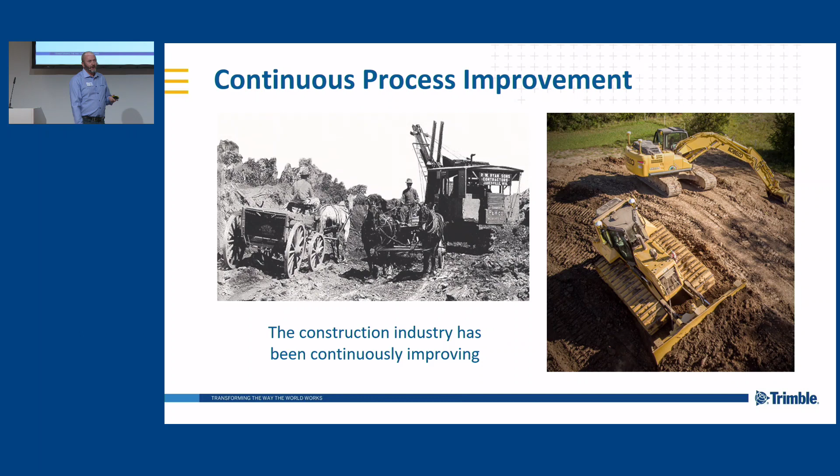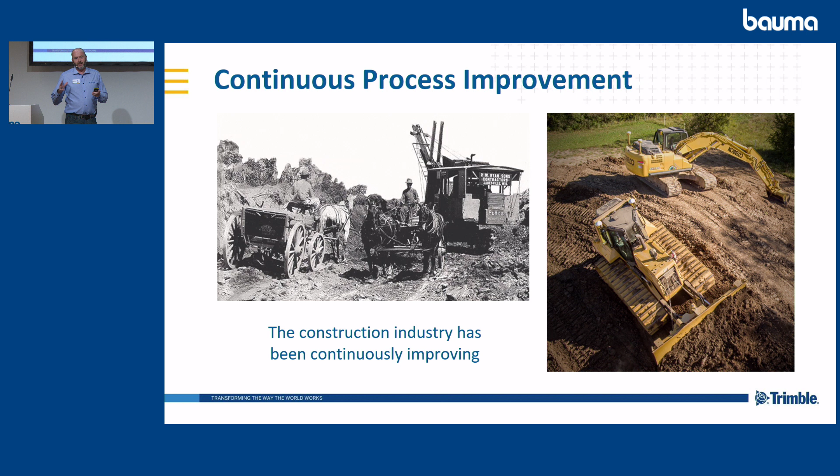But when you look at construction, the construction industry has been continuously evolving. Machines are getting faster and bigger, and just look at from the old horse and cart days to what we've got today with the heavy machinery and all the operator comforts that we've got. So not only just the machines, but the machine control itself has been on a journey.

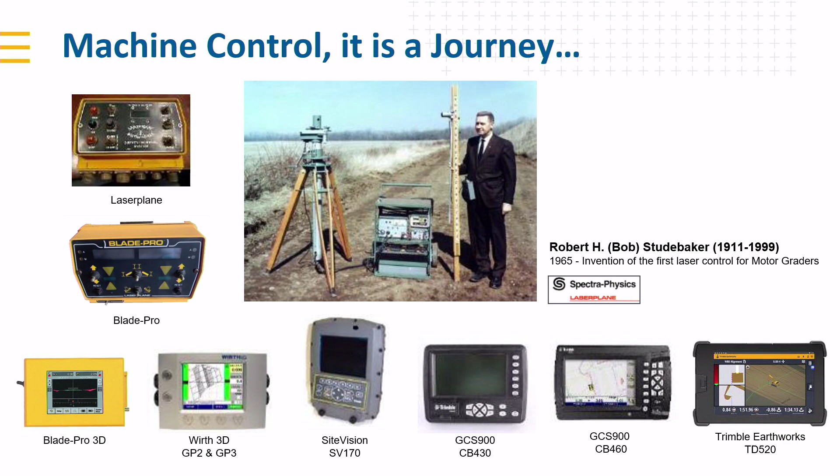And right through within Trimble with Bob Studebaker back in the late 60s, early 70s, when lasers were first introduced to motor graders. What comes after lasers and graders? Automation. So back in the 70s, we were automatically controlling a blade of a grader. So grade control's been around a long time. And over that, things got better, faster, cheaper, easier to use as well. A long time ago, things were very hard and complex, but things aren't like that anymore, and people understand and they trust grade control.

So I just wanted to show you that grade control has been going a long time, and grade control is the start of autonomy. It's automation, and automation at different levels is how you get to autonomy. And that's what we're going to talk about today. So machine control, pretty much any machine that you want, you can put a grade control system on it today. All the main machines, excavators, dozers, graders, scrapers, you name it, if there's a will, there's a way. Dealers can make it happen. And you can also buy machines out of the factory with grade control.

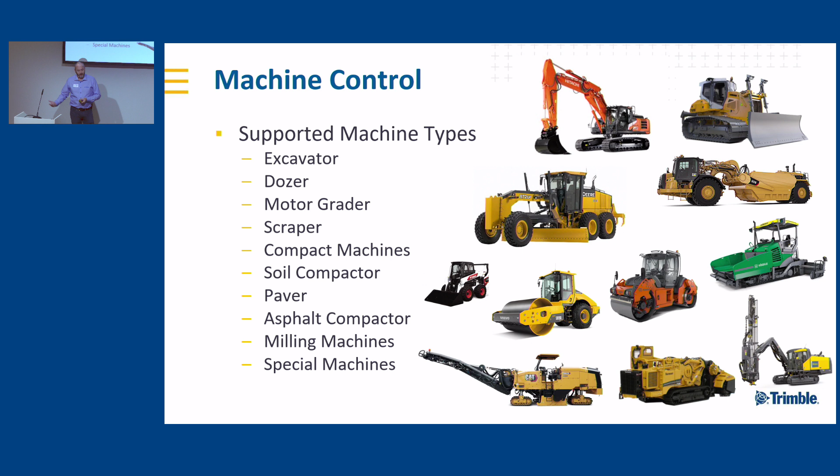And grade control is critical because you can talk to OEMs and they can spend millions of dollars over years of time, and they're looking for 2 or 3% productivity gains. You can put grade control on a machine, and automatically you can get 30% productivity gains. So there's lots of studies out there. One thing that we like to do is compare lesser skilled operators with advanced operators. And when you're leveraging automatics, it's so easy because you can just turn a button and we can help you. And we can see that we can definitely help new operators, but we can also help experienced operators.

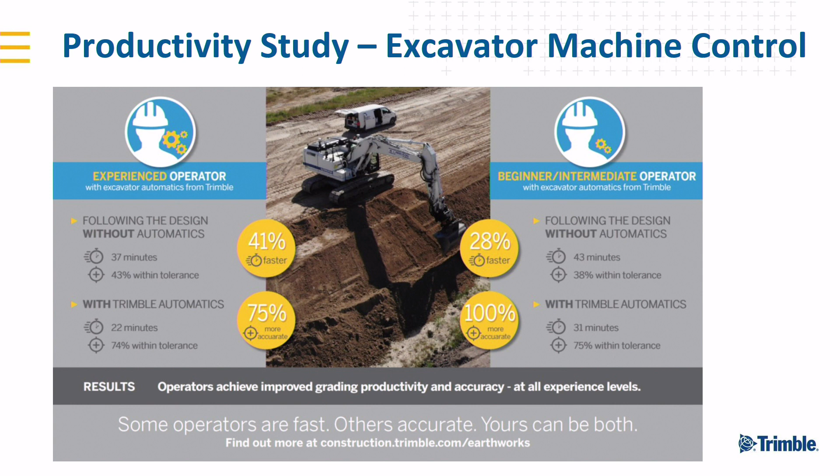And we've got some great examples where experienced operators are getting 41% faster and 75% more accurate. And we might not be able to make a lesser skilled operator as good as an experienced operator, but we can close that gap a lot. And we've seen examples of someone that's never really run an excavator before can get 28% faster. And the kicker here, 100% more accurate.

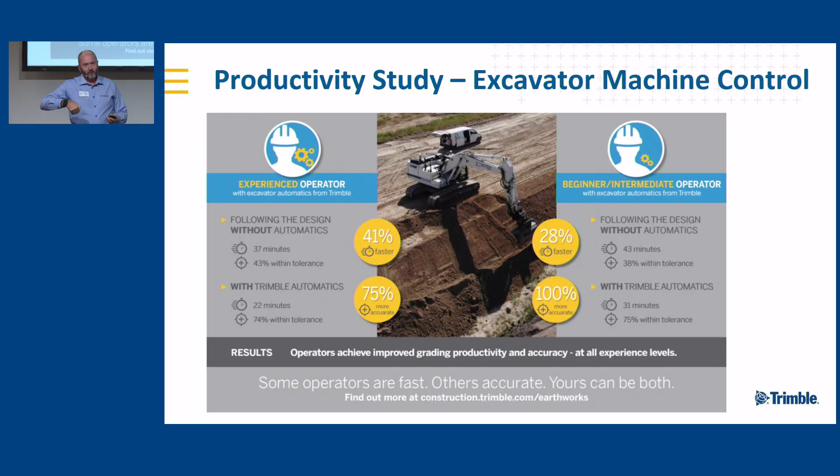And think about when you're doing excavation and stuff, and if you're accurate the first time, you can save money real fast, because if, say, you're trenching and you dig too deep, what are you doing with that material? Sometimes you've got to pay for it to get transported off-site. Then you come back in to put the pipe and you need the bedding. What happens? You need to actually put expensive material into the trench because you've taken too much stuff out. So yeah, a lot of cost savings, a lot of productivity gains, less fuel, sustainability. Sustainability is a key thing at the moment.

And what we've got, so we know there's technology, there's a new workforce coming through that isn't afraid of technology. But we've also got, on the other hand, experienced people that are actually leaving the industry. They're retiring.

So in Trimble, we call it the construction dilemma. Now, the problem: a lot of the systems that you can buy today, yes, you can automate it. You can click autos, and we can drive the blade to design. That's great if you actually know what to do as an operator. Like, where do I start to actually push the material? And with automatics on a dozer, for example, you could actually do the wrong thing faster before someone catches you.

And the foreman goes, whoa, stop doing that. Now you're having to move the material twice. So a lot of the systems today still require the intelligence of the person running the machine. But when you think about what we need to do for autonomy, we actually have to tell a machine what to do. And for Trimble, like I said right at the start, the journey to autonomy is important.

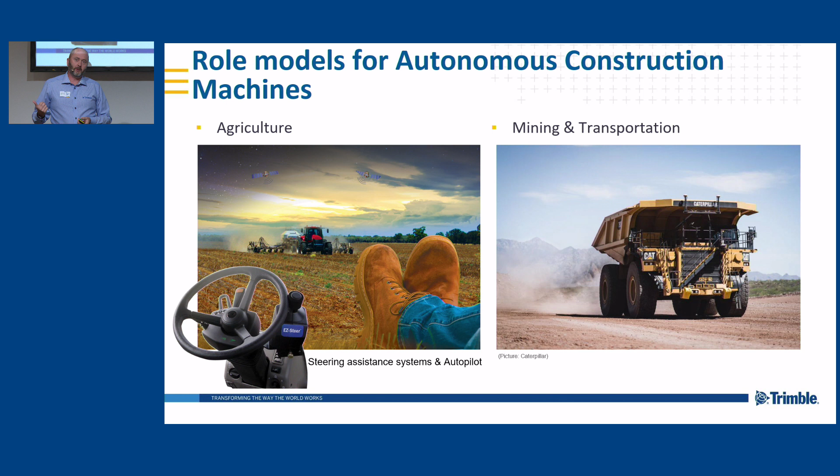So we can automate a dozer and steer it. We can steer a compactor. And compactors are very hard to actually steer because they articulate. And you're doing the same mundane task every day. And in order to make sure you don't miss anything, people are actually getting wider overlaps.

So if you can automate steering on a compactor, we're leveraging the same stuff as we've done in ag. You can reduce those overlaps, and you can make that a much better environment for the operator. So ag is a big role model for construction.

Mining and transportation is another one. Everyone knows there's been autonomy in mining for a long time. Caterpillar, right up there. Mining is different than construction though. A mine lasts for a long time in a controlled environment where you can control access. But when you think about what's happening in mining, you can take parts of it, but it's not the same. So you can't just turn the switch and take what you've done in mining to fit for construction. But there's a lot of learnings and a lot of things that we can reuse within mining and ag.

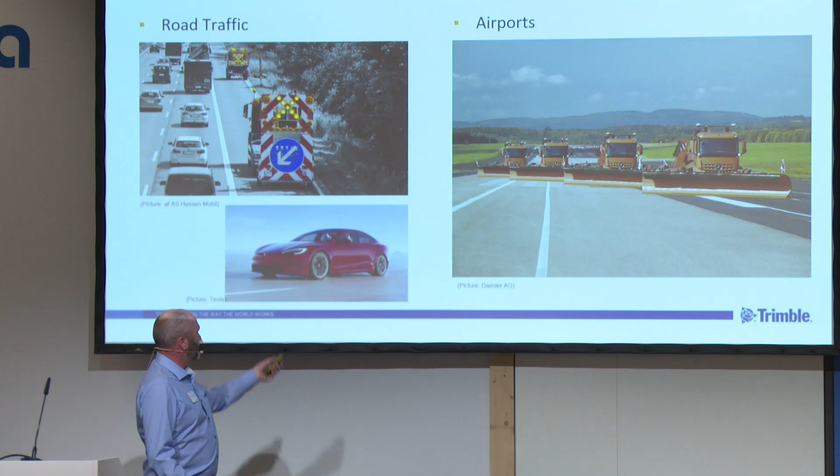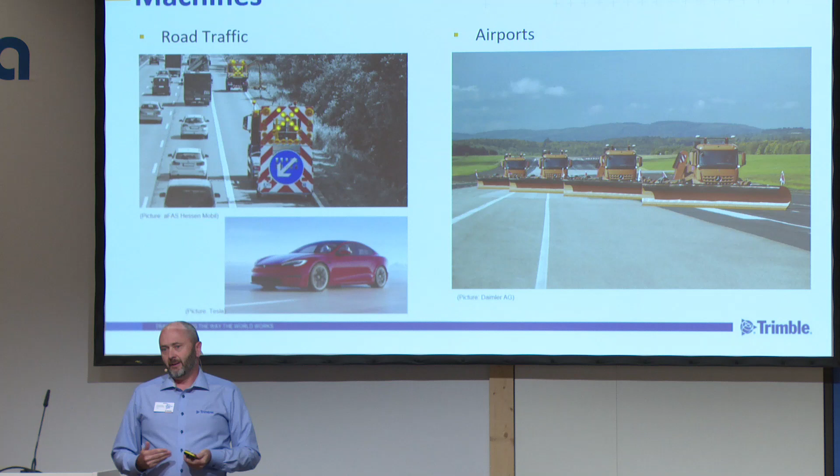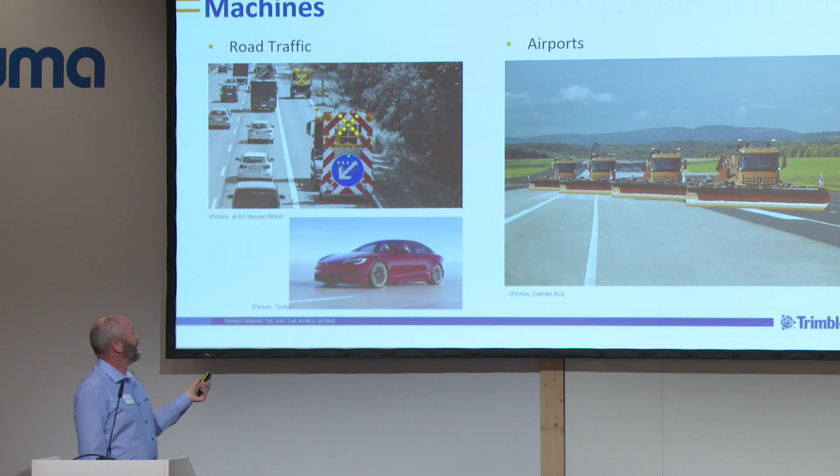Then you've got a lot of examples. Everyone knows Tesla sort of reset the bar and expectations. But then there's also lots of examples out there where you've got leader-follower type activities, where on the left-hand side, you've got a manned machine, and then you've got a safety vehicle coming in behind. If someone hits that, it's not very safe. So add safety, get the person out of it. It just has to follow that machine, that mower.

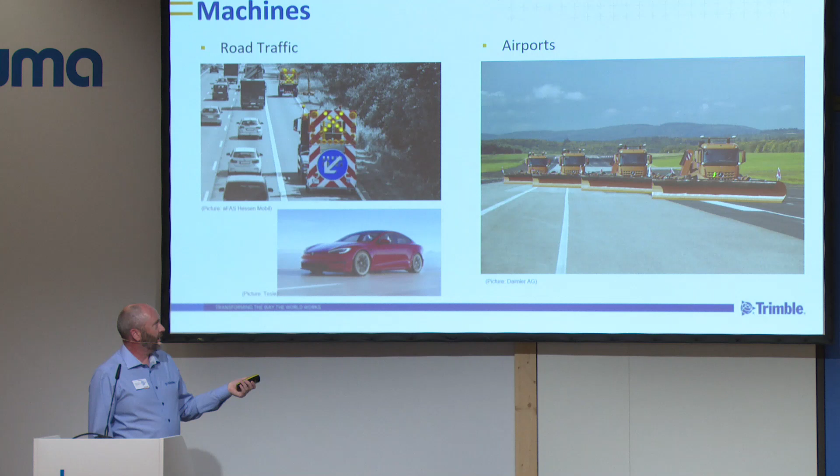Spreading and removal of snow on airports. A manned machine, and then in this case, you've got three machines following in unison behind. So it's not full autonomy. Well, part of it is, but there's still a person in it. And it's all about the journey and the progression. So you step back and think, so what's really motivating? What's driving autonomy?

There's certain tasks that are fit for automation and autonomy. Example, the compactor. Mundane job in a controlled environment where you're just going up and back doing spreading. If I was a contractor in a position where I could get the machine to do that, good. I'll go and do something else that's more useful for what I want to spend my time on.

Think about an autonomous excavator. Excavators are very dynamic and they do a lot of things. You're not going to just have an autonomous excavator that can do everything, but you might have an autonomous excavator that can do a certain few tasks very well, and maybe I want to have a break or I want to go and do something else. I'll set that excavator off and do a task. Maybe I just want it to trench. I'll go away and do something else.

So automation is really about helping people do their jobs and helping people manage more machines and really using the value of what people can do more efficiently and let the robots do all the mundane stuff.

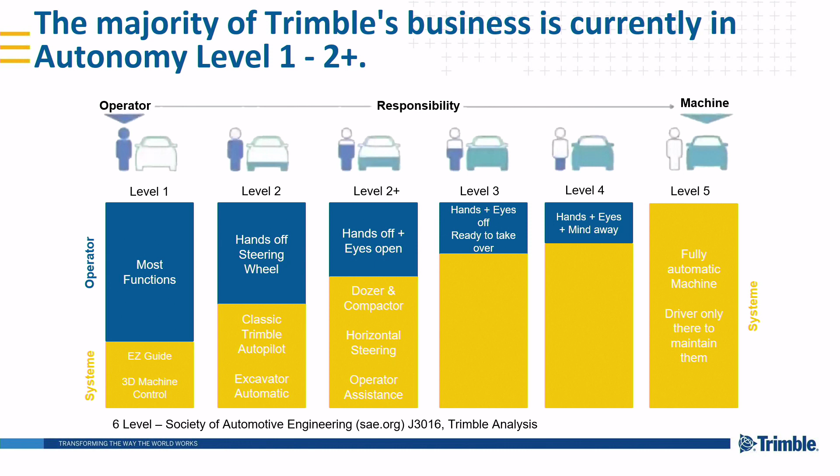So when we look at the different levels of autonomy, level 1 is basically the operator is still in full, complete control. Level 1 is still grade control, but I need to make the decision of what I want to do. The grade control system can give me indication and guidance, but the person is in full control. So your standard 3D machine control is level 1.

Then you start adding more automation to it. So we add automatics to that grade control system. Maybe we can steer things, but you're still in full control. Add some more automation. So you can start seeing the blue, which is the person, is doing less. Now within Trimble, mainly we're in the level 1 to 2 plus, where we add assistance with steering. We can automate the blade. We can steer it. But you still need a person in there, and the person is still in control. They're still going to stop.

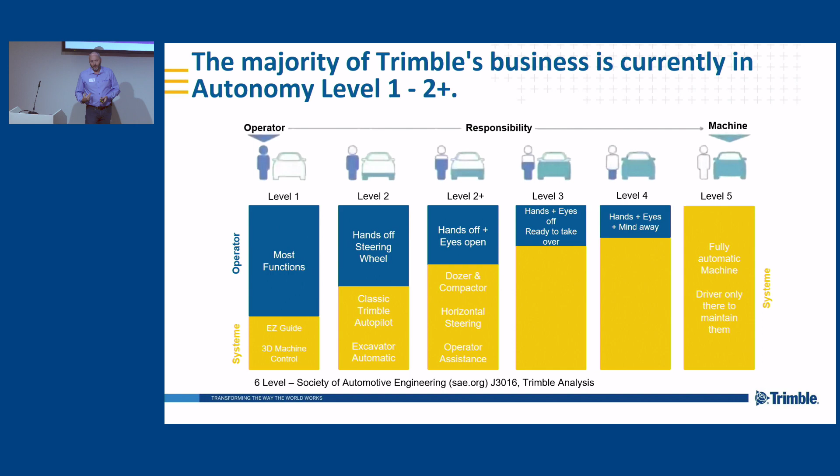Add some safety to it now. So the operator is still needed. They're still the final backup, but now you can start adding alerts and warn people that something's going to happen, to a point where the person's there and they're really just along for a ride. The system's going to stop when it needs to stop, but maybe that system can't do all the tasks and only a few things. Where level 5 is where it just does whatever it needs to do by itself for a lot of tasks.

That's going to take a long time, just like the other presenter said. But how we get there and the value that we can do along the way is where it really comes into play. So what do we need for autonomous construction?

Within Trimble, all of our autonomous solutions and assistance stuff that we're working on is all built around our fundamental core grade control system, which is Trimble Earthworks. It knows where it is, and then we can add to it with operator assistance. We've actually got an autonomous compactor here at the show, which is going to be our lead machine.

And one of the reasons that a compactor is our lead machine is it's very containable and controlled. It doesn't actually move the material, it just runs over it. But think about all the things that you need to create an autonomous compactor. There's a lot of building blocks that can be then scaled out and leveraged with other machines. So machine control and automatics is a key enabler of what we feel that we need for an autonomous machine.

Augmented reality and remote control. Augmented reality really helps with not only helping the person understand what they need to build and see, but also, when you look at augmented reality and cameras, you can start using those cameras for other things, with understanding the environment and being able to make decisions about what may be there.

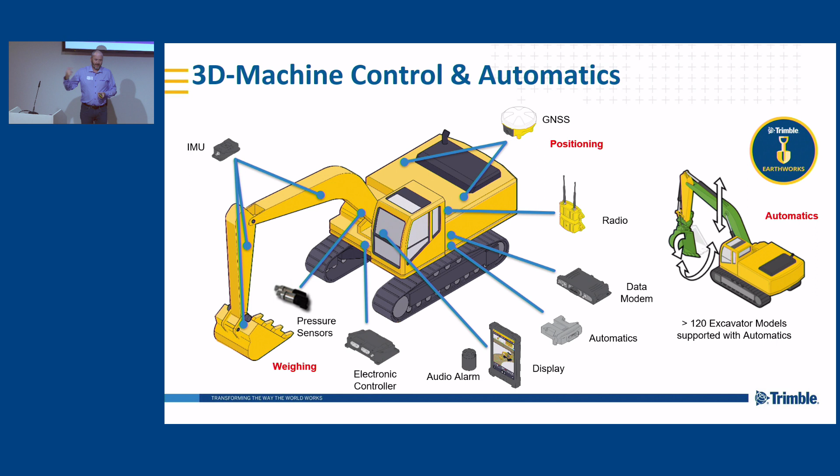Then you need the ability to have an interaction with a person or an operator, so you need a user display. And then you need the connectivity element, so you can send tasks and get that data off the machine to understand what happened. Then you need the ability to make something move. It could be with hydraulics, or it could be talking to the EH system on the machine.

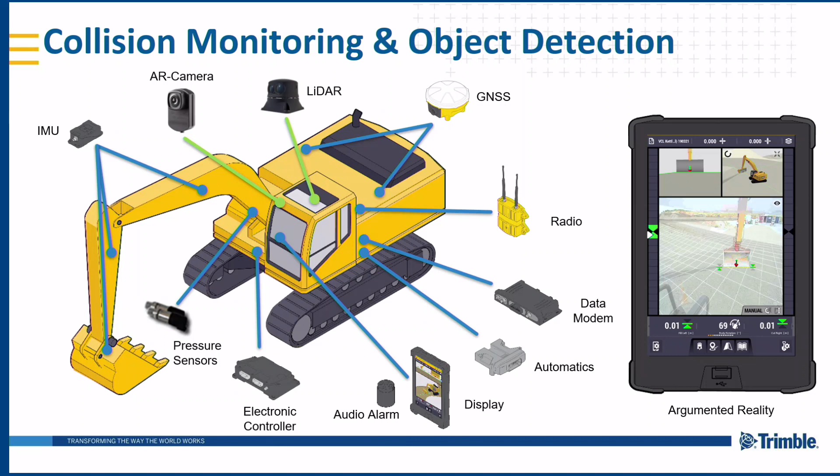Then if you're running autonomy or you want some safety aspects, you need things in there like what a person would do. A person's got eyes, so they look around and see. So you need to let the machine do that, with sensors on there to understand what's around the machine. In some cases, it's pretty obvious, right? But if you've got sensors on a machine where you can't see, it can see for you. So the ability to detect what's around you, and then there's tools to actually help the operator do their task.

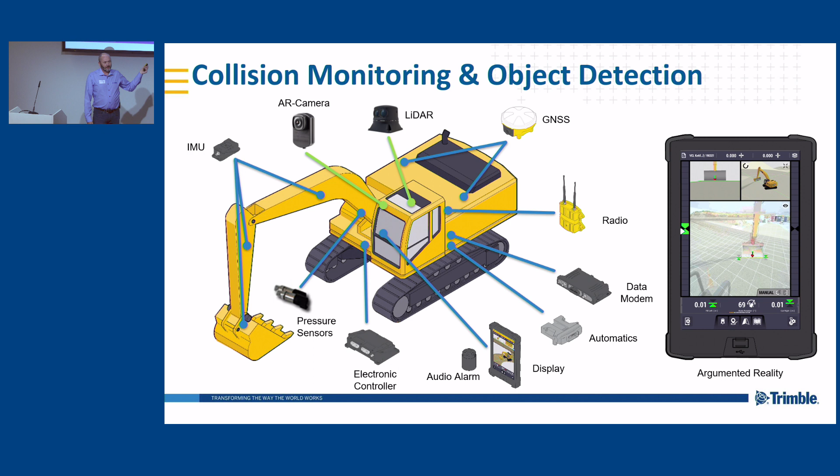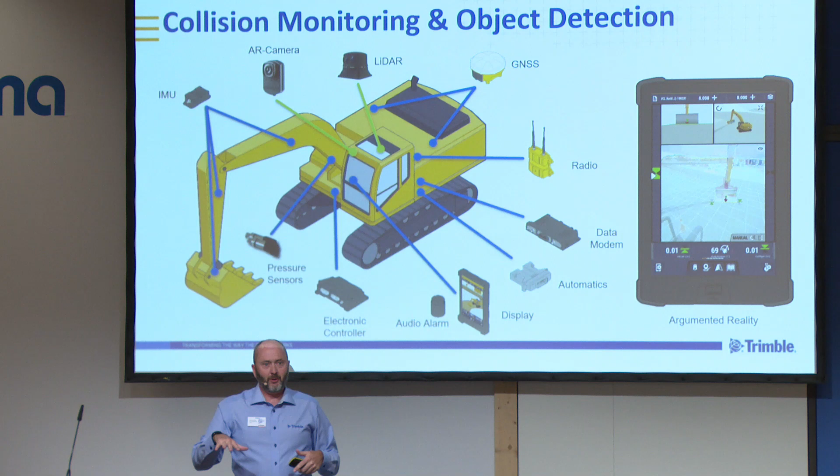There's an example here where we've got augmented reality on the excavator where you can see the design on the machine and you can also see the environment. And that's really good for people to understand what they're going to build versus just a 2D plan or a 3D view. You can actually see how that is in relation to the real site. And it's good just to visualize and understand what's happening.

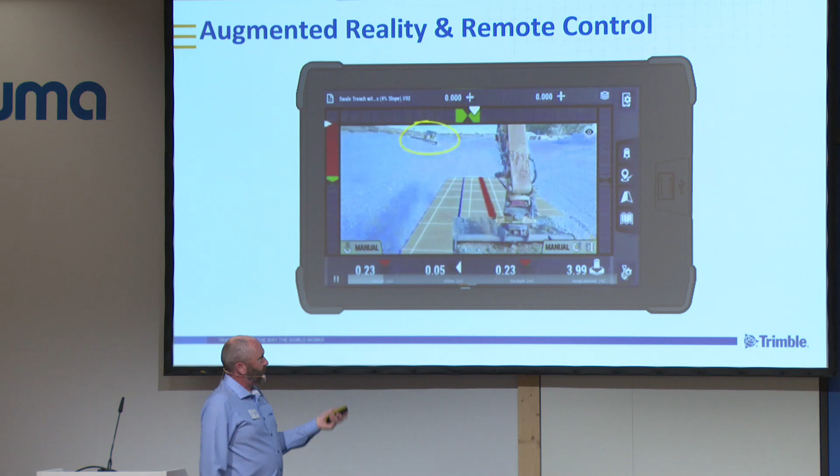Then you can take it a step further. Potentially you can see through the ground where the utilities might be. Or if you're looking at the machine display, you can get a sense of what's around the machine. Think of an excavator. You see it all the time. It's not safe, but a person in the trench, and you've got the operator looking over, trying to see what's happening. Most of the time, they're not putting the hydraulic lockout on. They're leaning over. What happens if you knock the levers?

You can hurt somebody. But if you've got the ability to see in the trench without actually putting yourself in a safety violation, then it's safer. Ideally, you don't have anyone in the trench altogether, but that doesn't always happen, right?

3D design and actual condition surveying.

So I won't spend too much time. I've only got 2 minutes and I don't want to get kicked off the stage.

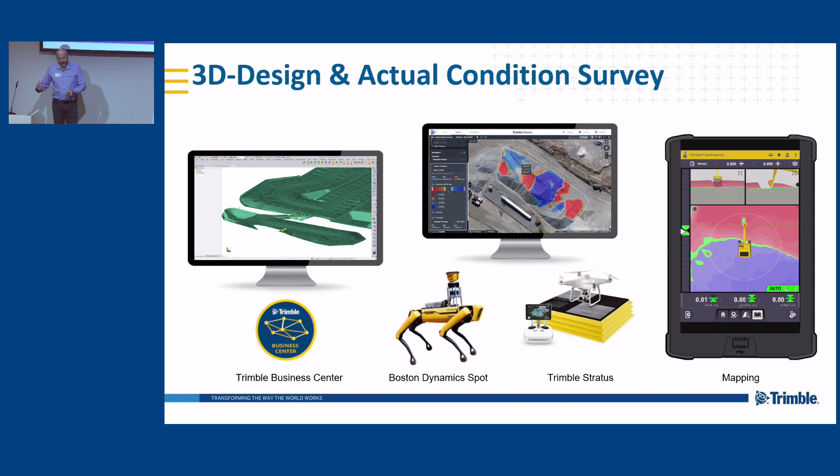But the key point here is that you need to have designs and stuff that you want to build. You need to be able to have the tools to monitor and record what's happening. And you need to do it now. And you need to be able to make those decisions without waiting next week to find out that you're behind schedule. And with that, you need tools to help you, like scanners, various software elements, and the tools to help you run the job. And all that stuff is needed for autonomy when there's potentially no one doing the task. But we can provide that value along the way.

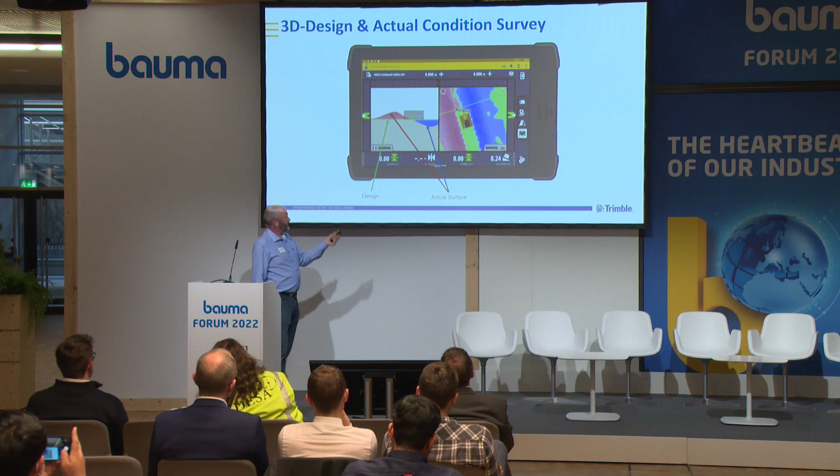And it starts, again, just adding more to the machine control. So in here, you can see the design. You can see, in this example, there's been a scan, and that's been uploaded into Trimble WorksOS. The machine control systems can pull all that information down and provide you a real-time cut fill map of the site in relation to the design that you're building. So you can see where the high spots are and the low spots are,

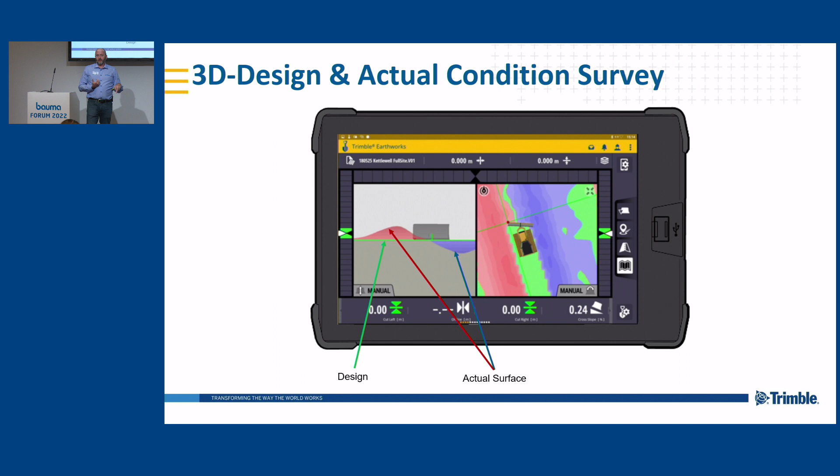and that can sort of help you do your task. And then as other machines and other surveyors actually survey and update the site, then that map on your display, in your machine, is going to be updating with it. And you don't have to wait for the stand-up the next Monday of the big cut fill board for the site. You can see it on your machine as it happens.

Here's a quick video. I'll try and start it.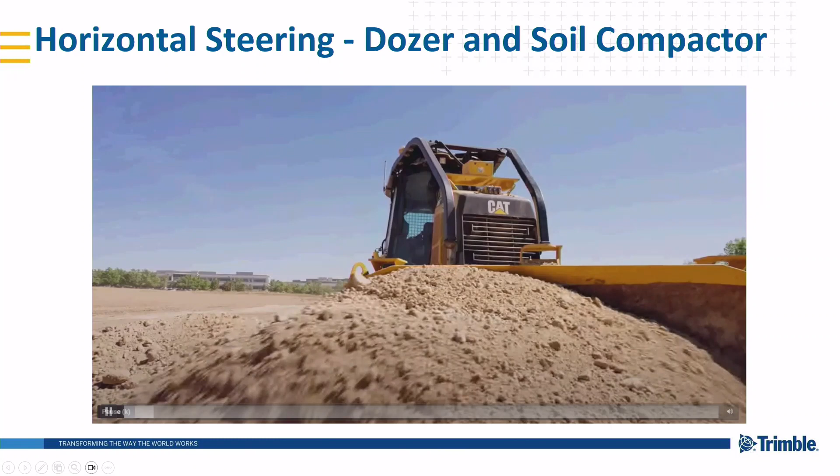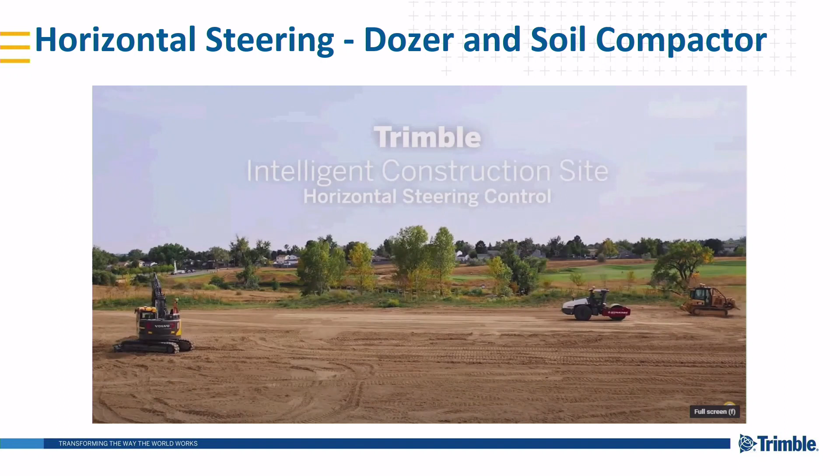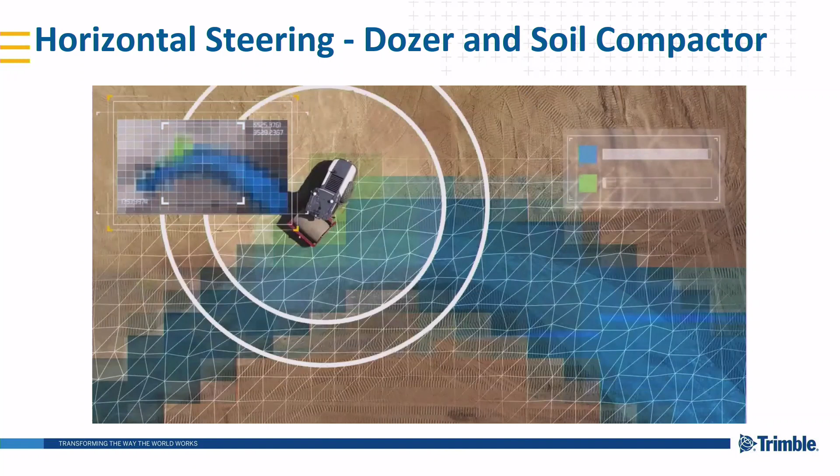Trimble is proud to partner with you on the journey toward a fully autonomous future. Taking the initial step to automate time-consuming and repetitive tasks boosts productivity, frees up resources, and gives you the competitive advantage. Horizontal steering control, available with Trimble Earthworks, helps you work smarter and faster. Machines equipped with horizontal steering control follow GPS-designated alignment to automatically travel without operator assistance. This means an operator can concentrate on blade height and angle for greater efficiency.

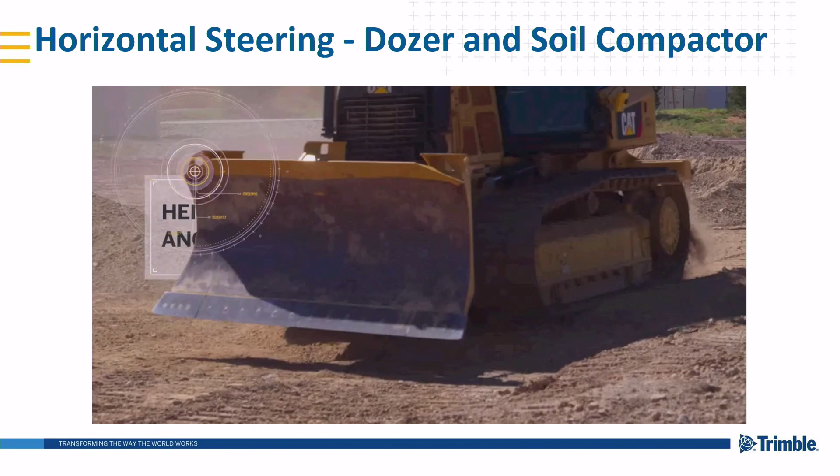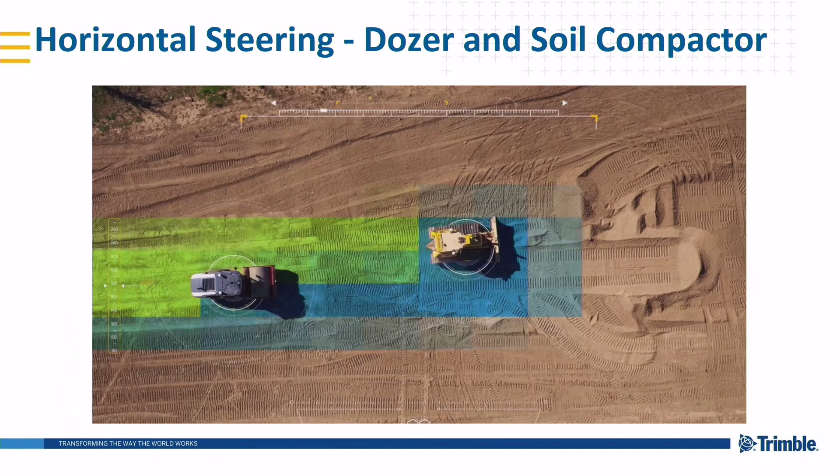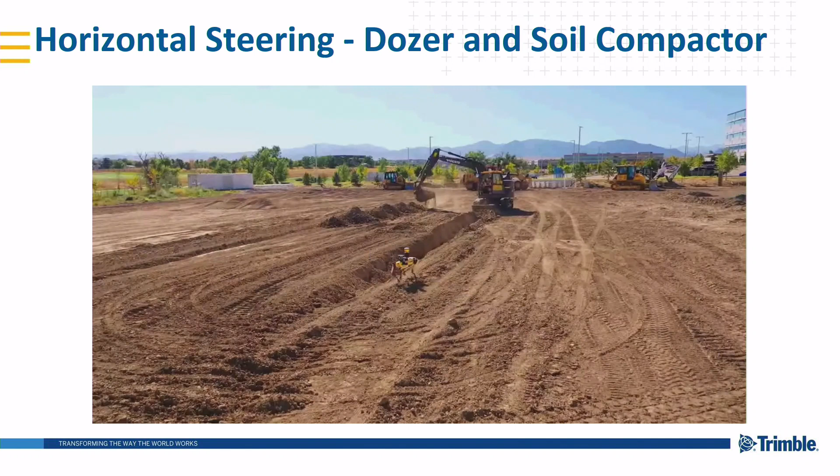Horizontal steering control creates more consistent lines, regardless of the operator's skill level. This reduces overlap and the total number of passes. It saves time and fuel, and delivers the highest quality spreading and compacting. Horizontal steering control is a vetted solution that's easy to combine with your existing fleet and workforce. In fact, it can decrease operator fatigue and error. Adopting Trimble's proven steering technology puts your business on the forefront of innovation and opens the way toward even greater autonomy. Wherever you are on the journey, Trimble is committed to delivering autonomy on your terms. The future of construction is happening now.

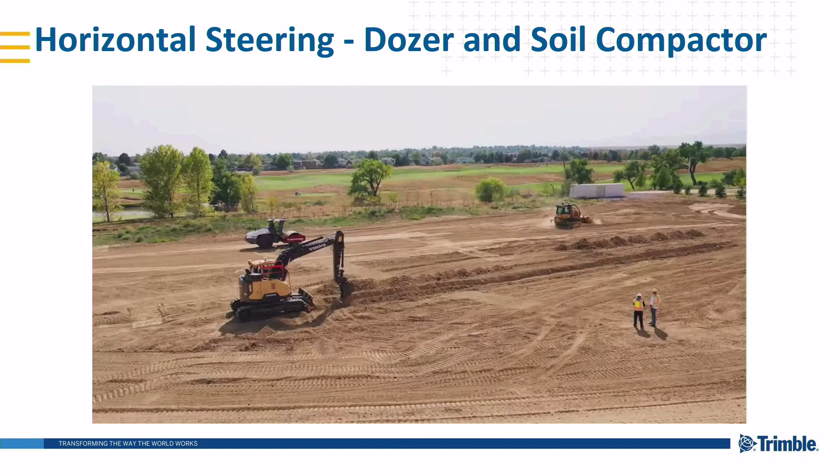So yeah, those are some examples of the value that we're adding now on our journey to autonomy. I'm just conscious of the time now. I mentioned before, we want to be able to optimize the site. With that, you need to be able to have a mechanism where you can collect all that information and add some intelligence to then update what's happening in site as needed.

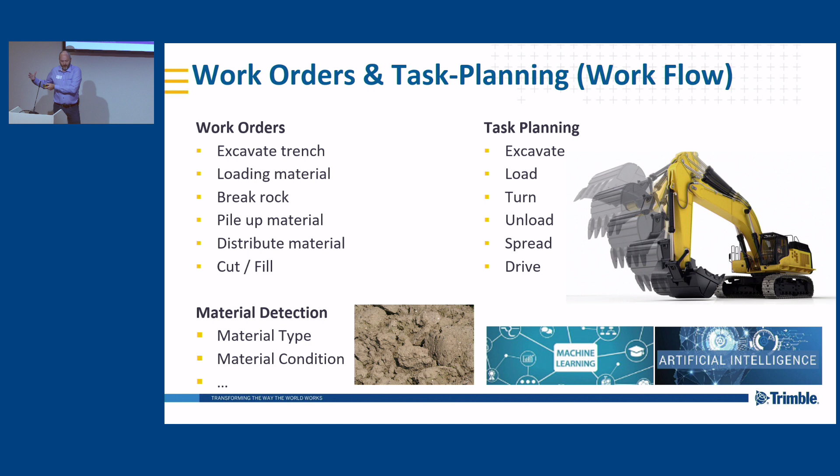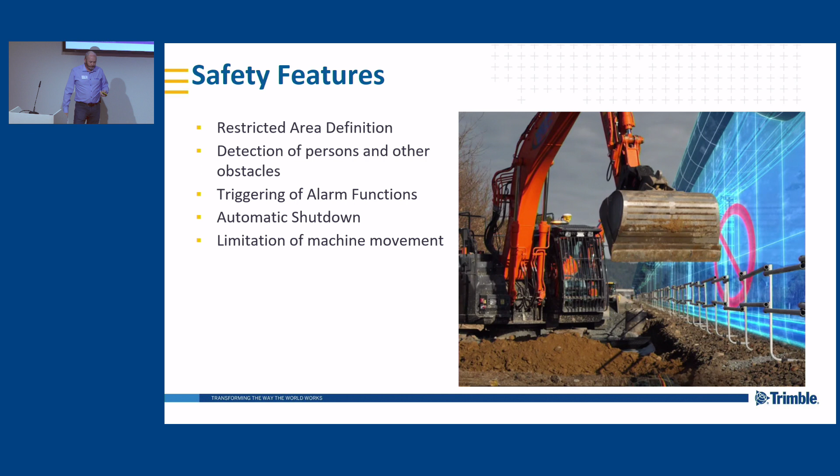I've talked to most of this, but it's about working out what you actually want to automate and what you need help with, and being able to understand how machines work together and not just focusing on machines as standalone items. You need safety for the operators. There's lots of stuff out there today to restrict movement of people, electronic walls, etc. And you need the tools to be able to run the site, not only for autonomy, but how you get there. Sorry, I'm blowing through this, but I'm over.

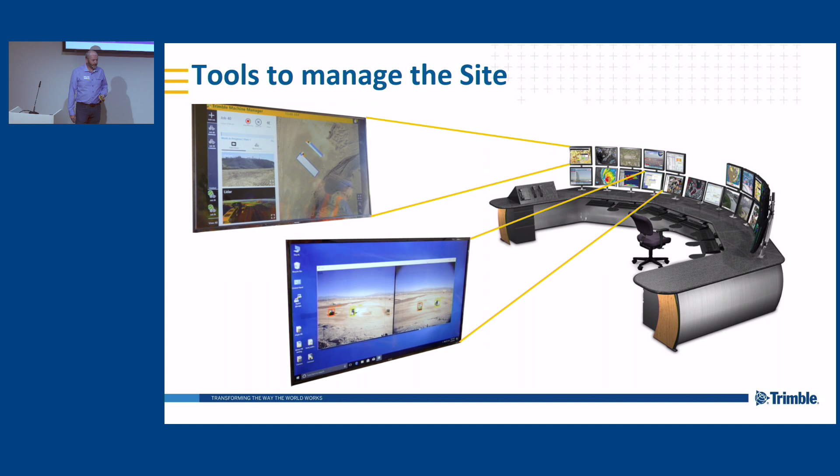There's all sorts of aspects needed with safety and operator assistance, the mechanism to collect data, send tasks, the intelligence to know what's happening and what's going to happen before it happens.